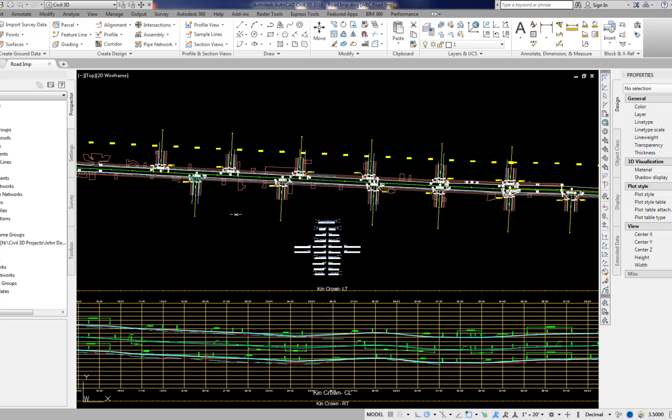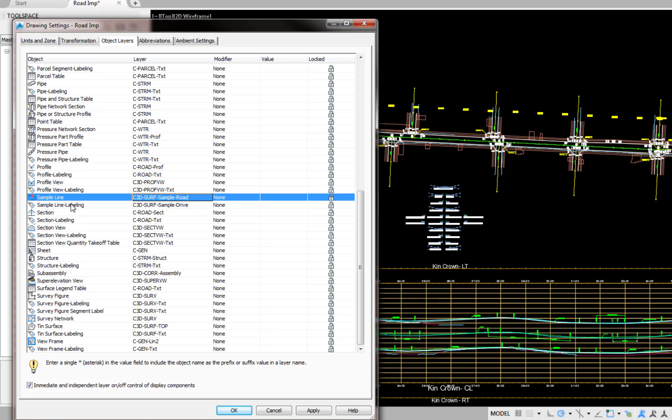Sample line defaults, settings: right-click drawing name, edit drawing settings, object layers, sample line, pick the current name. Scroll down to C3D, surf sample road, OK. Sample line labeling, pick the current. Scroll down to C3D road again, OK. OK. Right-click sample lines, edit feature settings, default styles, pick the current style, SL road, OK.

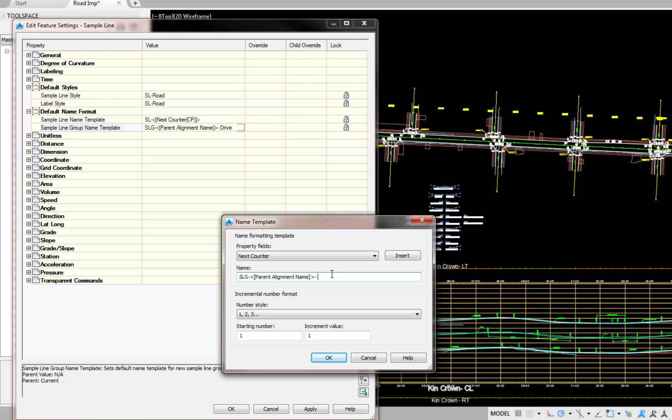Label style, pick the current style, SL road, OK. Default name format, sample line name template, SL next counter, sample line group name, SLG parent alignment name, remove drive, add road, OK. OK. Expand sample lines, expand commands, right-click create sample lines, edit command settings, default swath width,

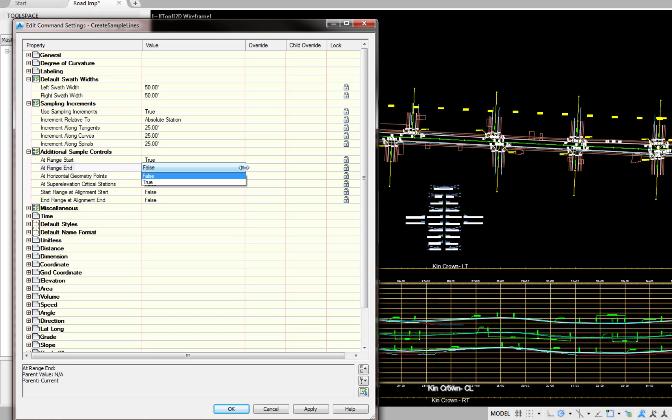left swath width 50 feet, right swath width 50 feet, sampling increment, use sampling increments, true, increment relative to absolute station, along tangents, curves, and spirals, 25 feet. Additional sample controls: at range start, true. At range end, true. All others are false. Miscellaneous: lock to station, true. OK.

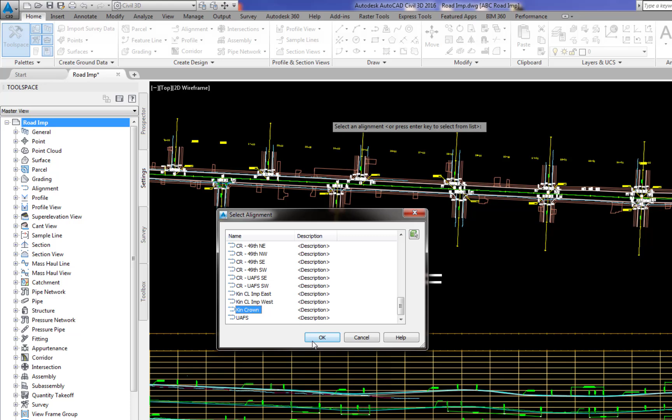Create sample line groups. Home ribbon, profile and section view panels, sample line icon. For the alignment, press Enter. Select Kin Crown from drop list. OK. In the dialog box, name, SLG parent-road, sample line style, SL road, sample line label style, SL-road, sample line layer, C3D surf-sample road, alignment Kin Crown.

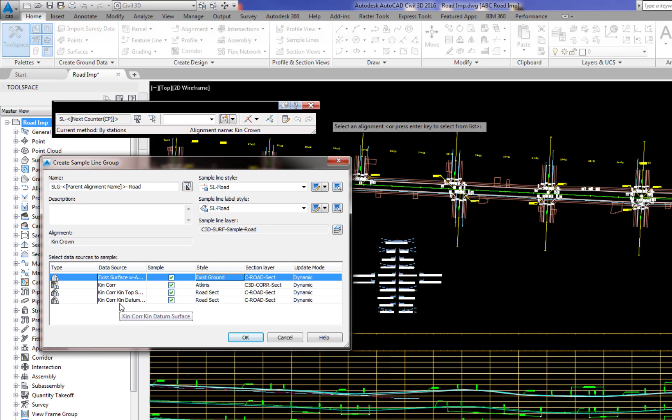Select data sources to sample, place check mark in all boxes, style, existing ground, OK. Kin Corridor Atkins, top and datum surfaces, road section layer, existing surface, C road section, Kin Corridor, C3D corridor section, top and datum surface, C road section, OK.

In Sample Line Tools dialog box, select arrow next to Sample Line Creation Methods icon, by range of stations. Alignment, check to ensure it's the correct alignment. From alignment start, false. Start station, 1085.01, which is the first region start station. To alignment end, false. End station, 3949.16, which is the last region end station.

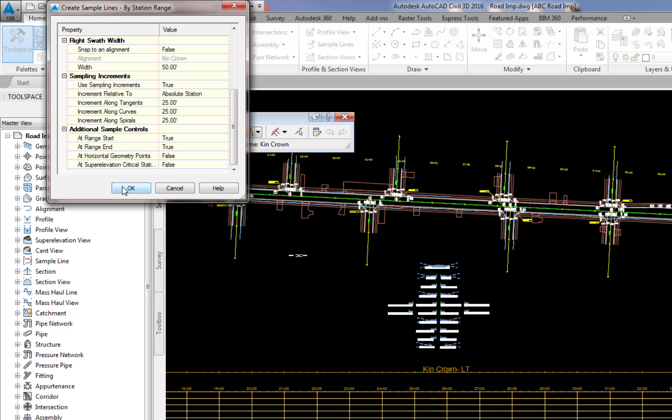Check the other parameters are correct, which were previously set in the defaults: swath width, sampling increments, additional sample controls. OK. It may take 10 to 20 seconds for the sample lines to appear. Escape. The station of each sample line is shown.

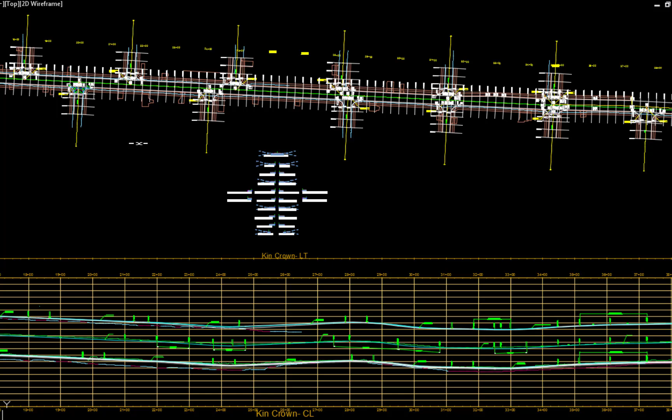For this video, all side road sample lines have been created using procedures similar to Kincaid. For side roads south of Kincaid, 9+00.01 was used for the start station and 9+64 at the BCR for the end station, except that for UAFS Drive 9+56 was used for the BCR end station. For side roads north of Kincaid, 10+36 was used for the ECR start station and 10+99.99 for the end station, except that for 49th North 10+42 was used for the ECR start station.

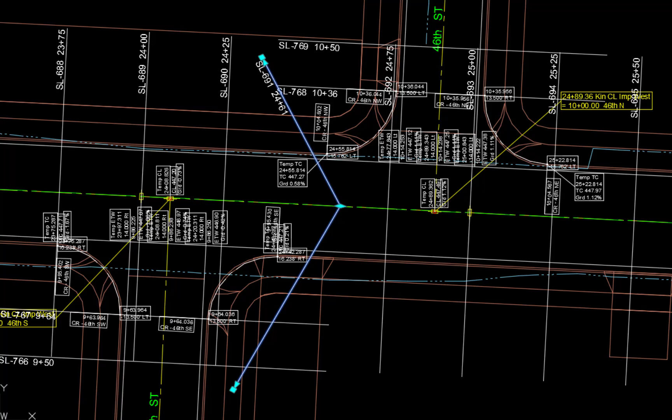Sample line editing procedures. Pick the sample line to be edited. Pick the diamond grip at the center to move the sample line along the alignment. Pick the triangle grip at either end to move the sample line either inward or outward. Pick the square grip to rotate the sample line about the center line. Control Z to undo.

The spacing between sample lines should be approximately a maximum of 25 feet and a minimum of 10 feet. Place location of sample lines visually. Do not be too concerned about stationing. Sample lines along the primary road at an intersection should be located at or near a BCR, at or near the side road ETW. The swath width of the primary road sample line should be terminated at the BCR-ECR sample line for the side road.

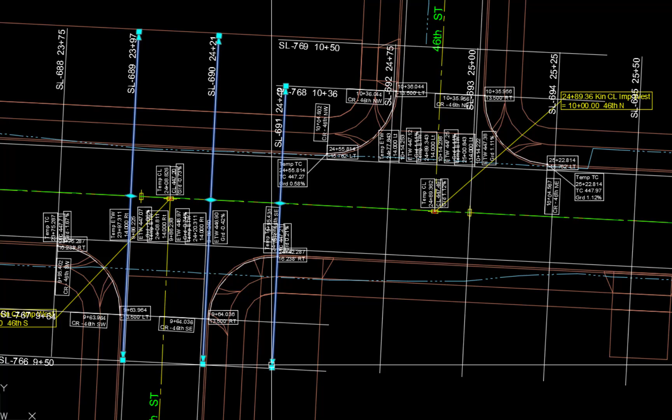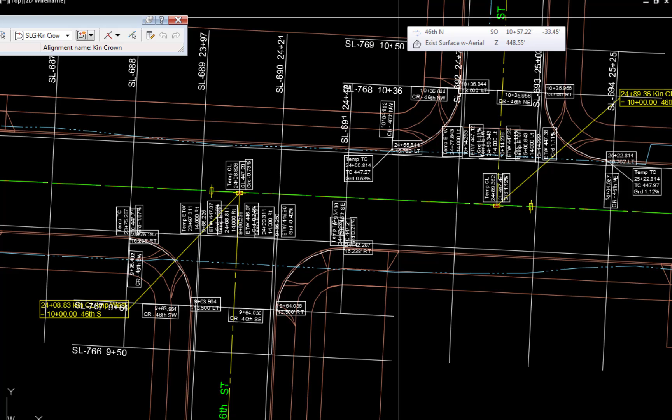Add sample lines to an existing group. Home ribbon, sample lines. For the alignment, press Enter. Pick from drop list, Kin Crown. OK. Specify stations along alignment will appear. Pick the desired location for the sample line. Press Enter to accept the left swath width or enter a value. Press Enter to accept the right swath width. Pick additional stations as desired.

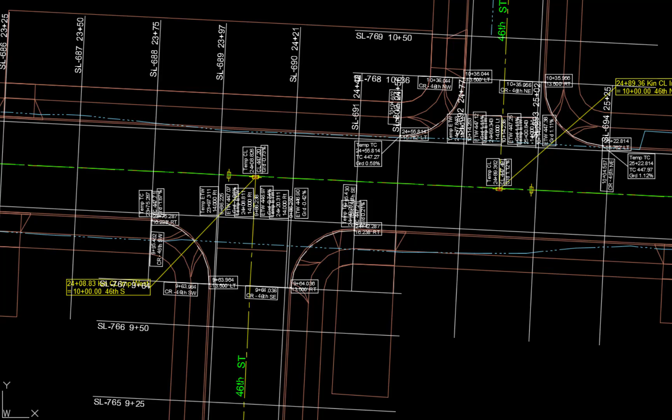Escape when finished. At the current time, the only sources that can be sampled are the corridor and the existing top and datum surfaces. At a later time, additional sources can be sampled, including storm, sewer, and water pipe networks. To sample more sources, if the sample lines are visible, pick a sample line in the desired group. In the context-sensitive ribbon, pick Group Properties, Sections tab, Sample More Sources button.

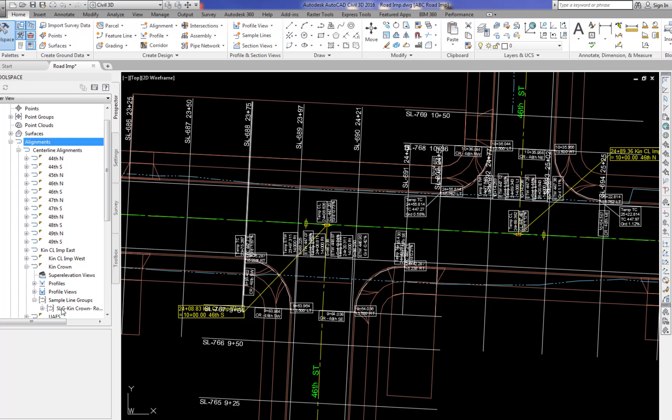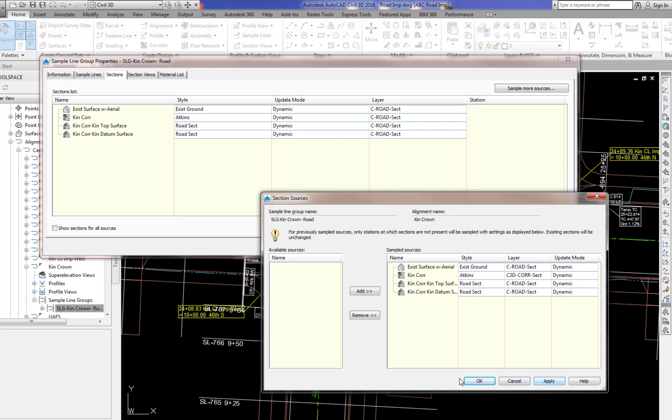Escape. If sample lines are not present, Prospector, Alignments, Centerline Alignments, Kin Crown, Sample Line Groups. Right-click the Kin Crown Sample Line Group, Properties, Sections tab, Sample More Sources. In the Section Sources dialog box, select each desired available source to be added. At present, there is none. After selection, press Add. You need to press Apply before OK. Then press OK. OK.